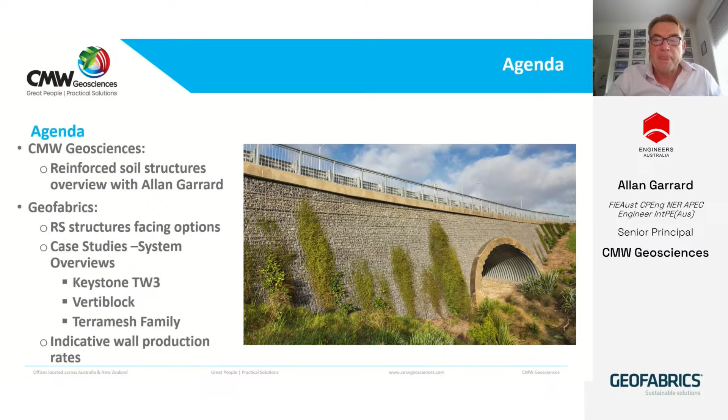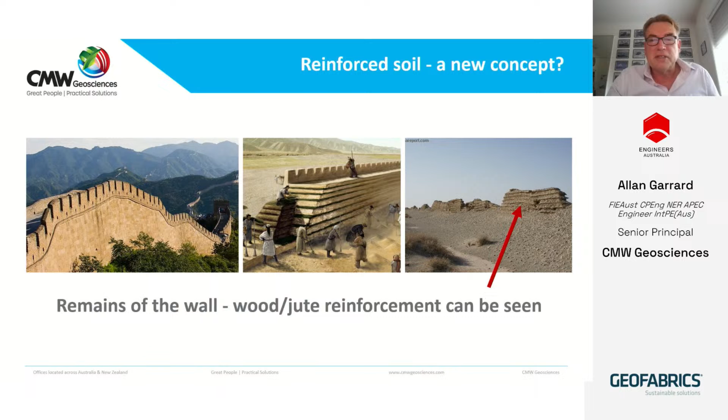So reinforced soil isn't a new concept at all. It's been used over hundreds and even thousands of years. The Chinese were into reinforced soil structures, and there's plenty of evidence of that around the world.

I was first involved in reinforced soil structures in the mid-80s when it was quite new in the UK, and we designed different types of reinforcement in soil structures and instrumented them to convince the road authorities at that time that these actually worked. So modern reinforced soil structures really came about through the advent of plastics, high strength plastics.

So it was a breakthrough in innovation at the time, early to mid 80s, and has been used extensively throughout the world since.

The greatest attraction is the versatility of these types of structures, and they can perform under extreme loads and have the ability to reach great heights. Asia is a good example of reinforced soil structures where designs have gone up to 60, 100 meters or more. And there's some examples there in the photographs.

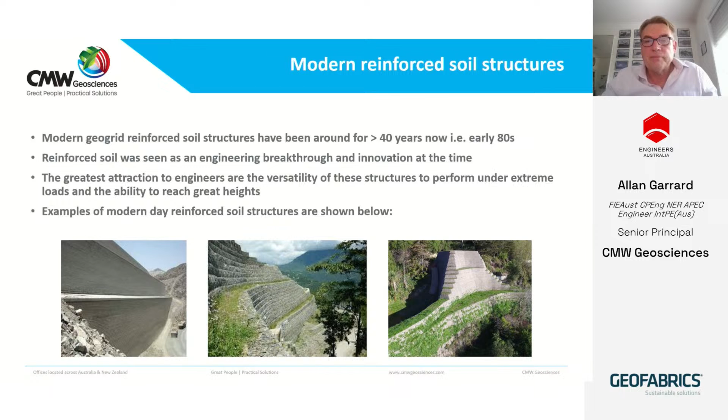So also through time, reinforced soil structures have become much more cost effective compared with other types of retaining walls. And this is a graph from Koerner et al., which indicates that after around 4 meters retained height, reinforced soil structures become hugely cost effective, and especially that cost effectiveness increases with height.

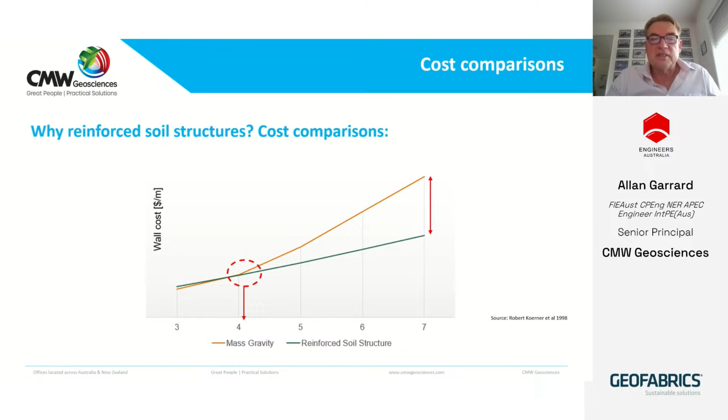So these are the components of a reinforced soil wall. You've got some sort of facing element, and there are a huge number of examples of facing elements, and I've used many throughout my career. You've got the reinforcing element, which can be grid or high-strength geofabric.

And then usually there's some sort of internal drainage system within the wall, and often behind the wall at the heel of the wall, to make sure that the wall doesn't experience loads from water seepage and flow.

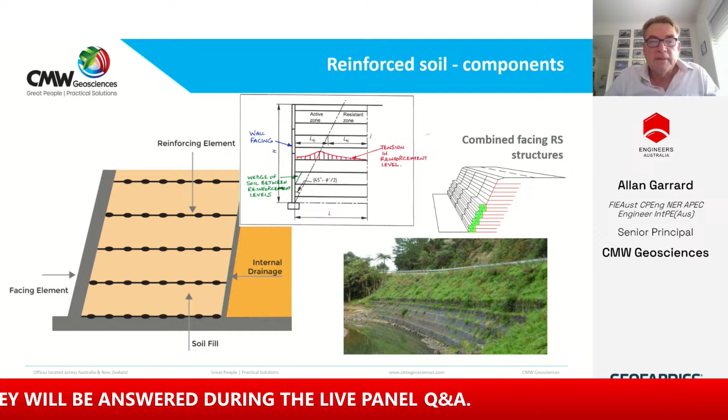In the middle of the slide there, I've got a little cartoon which shows how a reinforced soil wall works. So if you look at that active wedge coming up from the toe of the wall, if the reinforcement and the facing weren't there, that active zone would be lying on the ground in front of the wall. What the reinforcement and facing does is allow that structure to be built vertically, and you can see in red a depiction of the tension in the reinforcement element, which is fairly small at the facing and really only serves to retain a small wedge of soil between the reinforcing elements at the face, shown there in green.

And then the tension climbs to around a maximum of around where the active wedge crosses through the reinforcement, and then the tension tails off towards the back of the reinforcement.

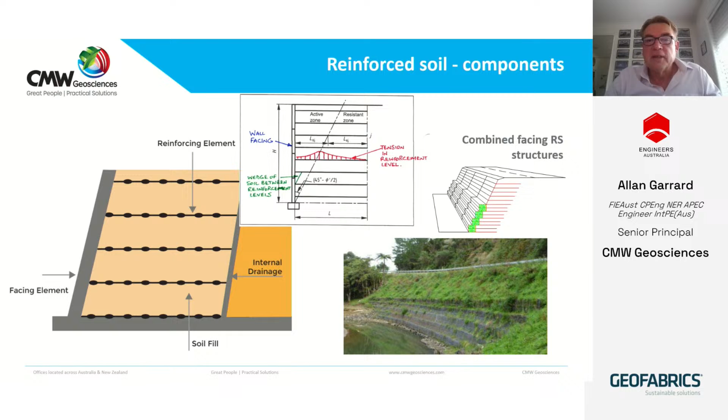There are many structures which utilize a combined facing. The example in the photograph there and in the sketch above shows a sort of gabion type facing for the bottom half of the wall, and that's to do with issues of erosion from flooding of the creek. And then the remainder of the wall can be a separate facing system. So that's quite common in practice.

This is a real world example of how the reinforcement works. You can see the block facing at the front. The reinforcing elements are shown in red dotted lines, and the active wedge is shown in yellow. The reinforcement allows that wall to stand vertically.

One of the reasons reinforced soil structures are so cost effective is that the vast majority of reinforced soil structures are built from soil, and the reinforcement and facing is only a small part. So the actual materials required are very low in volume, and the reinforcement acts with the soil as a composite system.

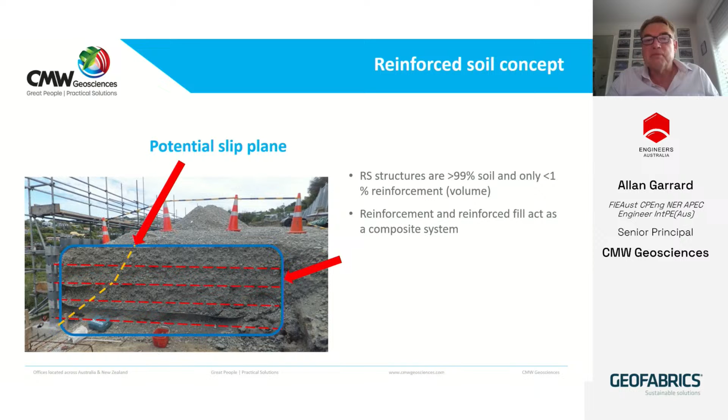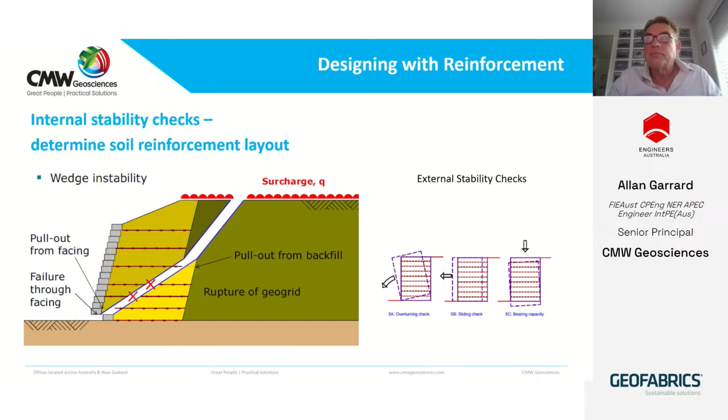These are failure mechanisms directly from the Australian Standard, AS4678, earth retaining structures, as shown in the standard. It's critically important if you're embarking on designing reinforced soils, or any civil engineering structure, to understand what the mechanisms of failure could be. That's where I start when designing anything - how could it fail?

So these are examples given: sliding at the base, sliding on one of the reinforcement levels, rotation about the toe of the wall, rupture of a connection - either an anchored connection or a connection where geogrid is wedged between two elements of the facing system - rupture of the reinforcement at the connection, and some sort of failure or rupture of the facing itself.

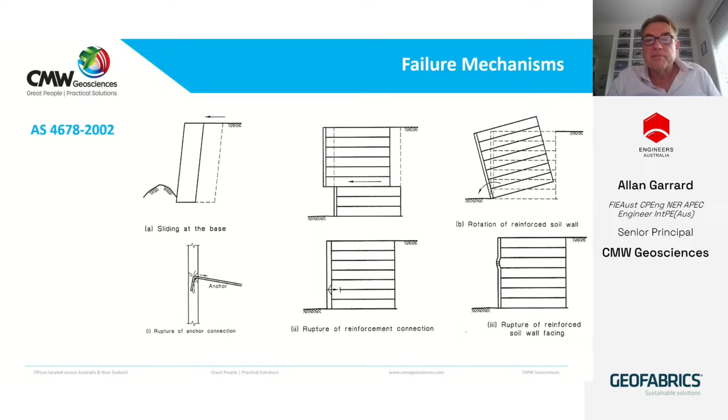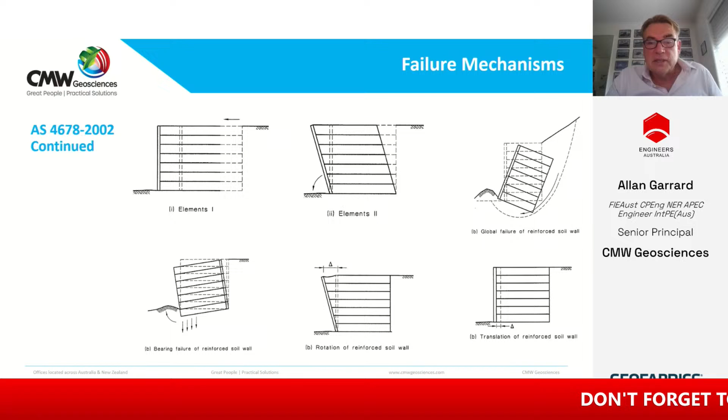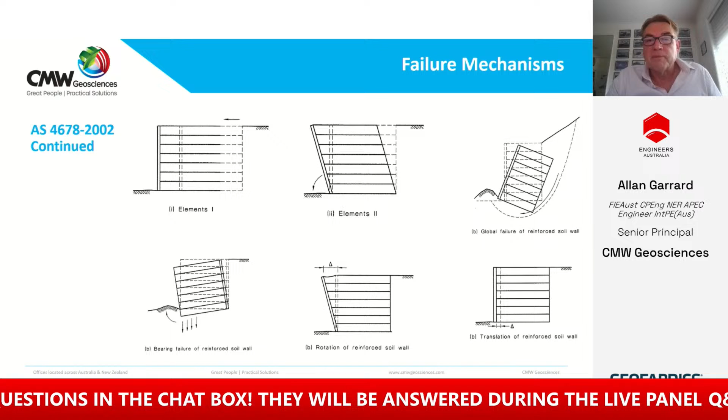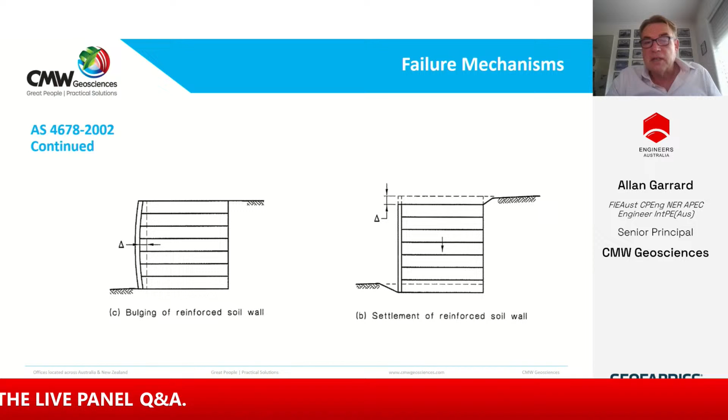Bottom left is bearing capacity failure. Bottom middle is rotation of the face, which could occur if the reinforcement is too extensible. Bottom right is some sort of translation of the facing. These are the last two in the Australian Standard: bulging of the facing and settlement of the reinforced soil block itself.

Now we'll talk about some examples from practice that I've been involved with and others that I know have been involved with, comparing these actual examples of failure mechanisms to those depicted in the Australian Standard.

On the left, this wall has suffered sliding at the base, and there's a little bow wave in front of that wall, which is difficult to see but it is there. There's also a separate, and possibly combined, mechanism of sliding and global stability.

On the right, you can see tension cracking at the back of the wall. The wall's underneath that speed bump. So the wall is possibly rotating as well as sliding forward, and also some bulging happening on the face. That's multiple mechanisms for one wall.

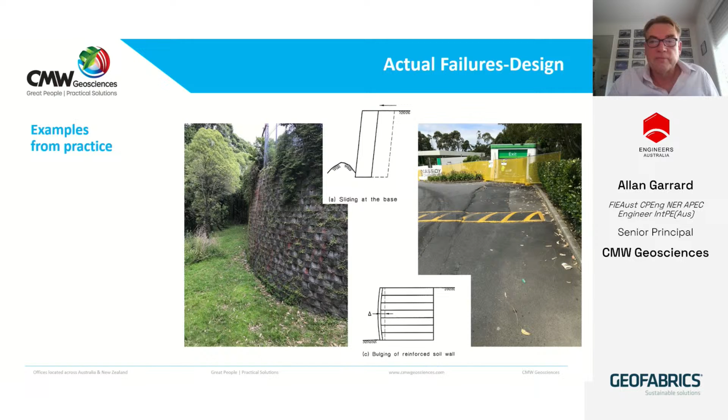This is an example of where the wall has failed in sliding on one of the reinforcing elements, so that needs to be checked as part of the internal stability analysis.

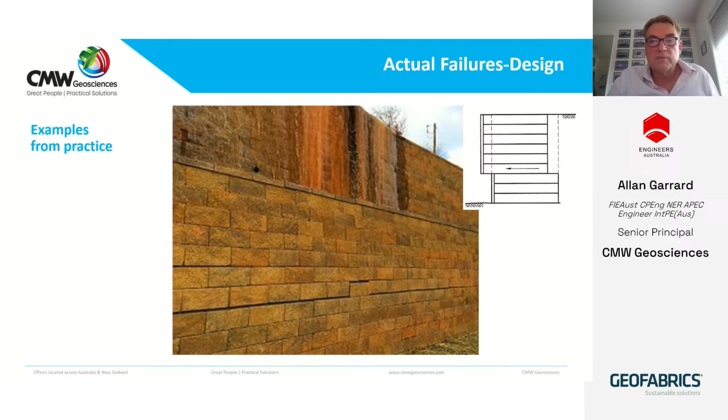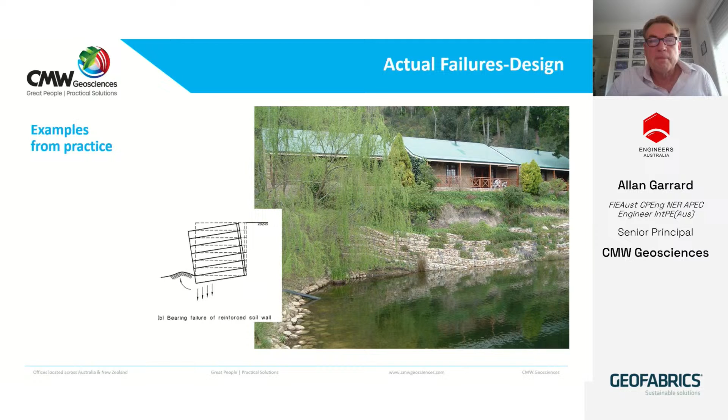This wall is a bridge abutment. The wall is off and down to the right, but it's failed in global stability, where the wall has rotated, and that bush is growing out of the major tension crack that has occurred in the road.

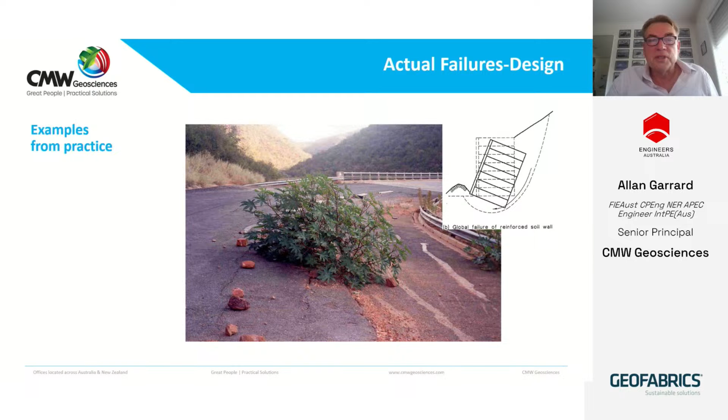This is another example of global stability, but in the previous case, the failure envelope exited well in front of the toe of the wall. In this case, the failure plane or failure envelope exited near the toe of the wall.

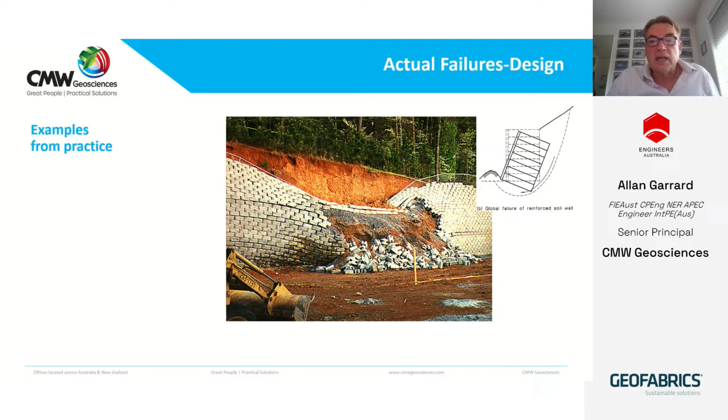Here are examples where the reinforcement connection has ruptured, allowing the facing to spill forward. Although it's not a catastrophic failure, it's certainly something that needs to be fixed.

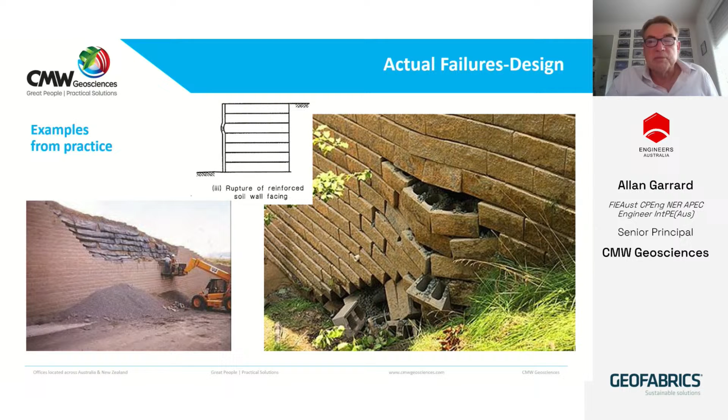This one here is more on the construction side of things. The previous failures were more about design issues. This one is where the reinforcement wasn't long enough. In fact, it was curtailed by the contractor because of a whole load of services that had to be placed in the back of the wall. So the contractor hadn't been talking to the designer about whether it was possible to curtail reinforcement at the back.

The sketch on the right-hand side is one I was involved in many years ago, where the design length of reinforcement wasn't achieved because the contractor didn't understand what the reinforcement was doing, why it was necessary, and skimped on the excavation. So although the reinforcement was the right length, it wasn't placed in the right spot. It was just led up the slope, and we dug forensic slots into this wall to find that this was the case.

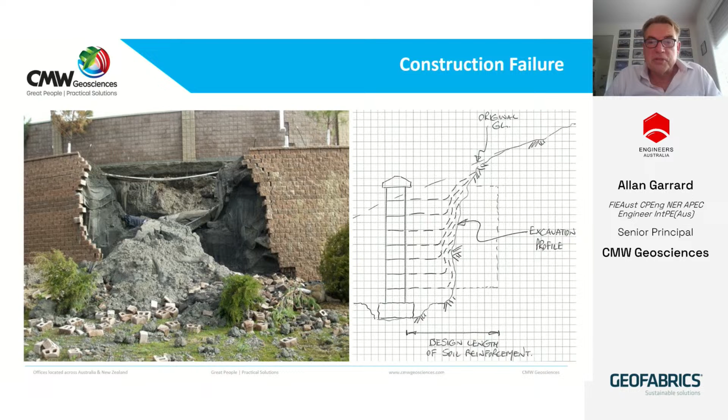So the other main category of failures is drainage issues. We've had design issues, construction issues, and drainage issues. Drainage issues, you could say, is probably mainly a design issue, but could also be a construction issue, and could be a temporary works issue, because the wall on the right failed during construction with insufficient drainage to avoid the development of sinkholes after heavy rain.

The one on the left is mainly about erosion, where the reinforcement's been exposed by excessive erosion.

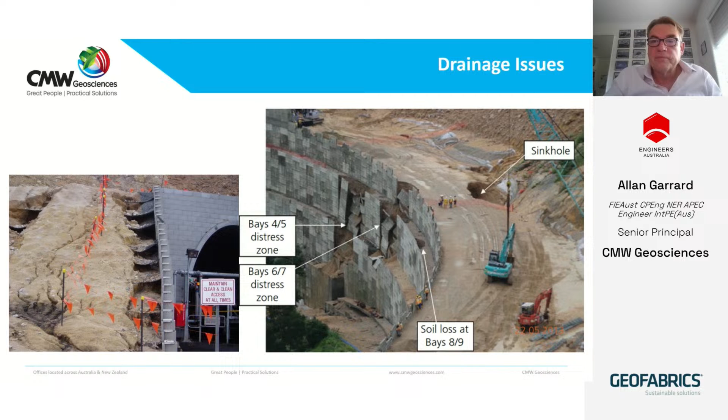This is an example from my own experience fairly recently. This is a 27-metre high reinforced soil wall built in Queensland, Australia. We used the TerraMesh system with a gabion front and TerraMesh tails and a main Paralink reinforcement system. This wall caters for heavily loaded large mine trucks, as well as being as high as it is, and hasn't suffered any movement at all from the monitoring that we've done.

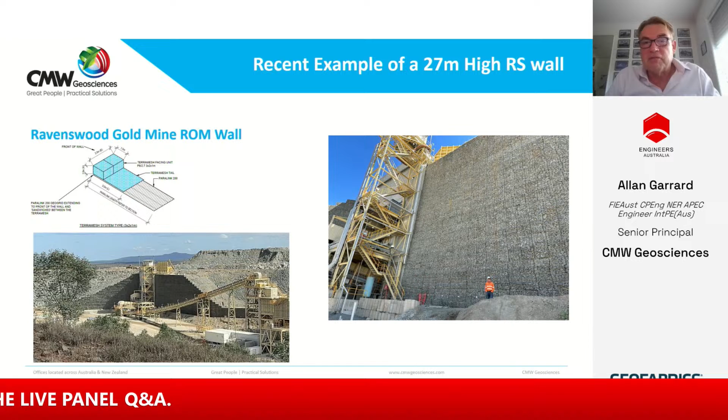So this shows that these types of walls can be built very high and to cope with very large loadings. The beauty of them is that they have a flexibility to cater for large loadings and extremely high heights. Thank you.

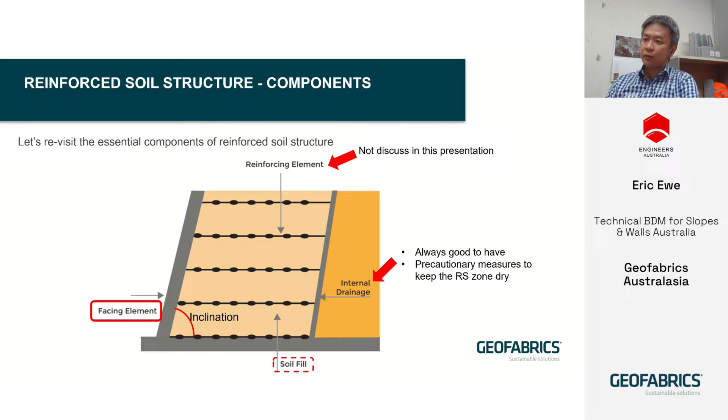At the same time, we're going to also talk a little bit on the different types of soil available for the type of reinforced soil structures, depending on the face inclination. We don't have time to discuss in detail the options of reinforcement used in this presentation. And it's always good to know that as a reinforced soil system, you probably want to allow for some internal drainage. It is something more of a precautionary measure to keep the reinforced soil structures dry.

Before we talk about reinforced soil facing systems, these are the common factors when it comes to consideration on the type of facing system. They are obviously aesthetics - this dictates the final look of the structures to blend with the surroundings. The face angle affects the type and suitability of the fill material specification. We'll cover that a little bit after this.

The speed of installation also can be dictated by the type of facing. Certain types of facing obviously will be able to construct quicker than others - situations such as emergency works requiring speed, cost of labor, etc. Location also matters, depending on where you are, some facings may be readily available, so that dictates the consideration for facings as well. Lastly, environmental - some clients prefer a vegetative look, or some prefer a rock look, to blend with the environment.

Obviously, all of that affects the entire cost of the retaining structures.

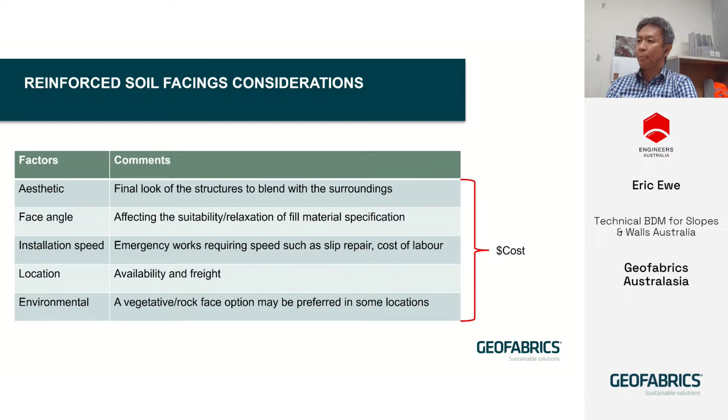Before we talk about facing systems or options, it's good to know the demarcation or determination of whether you're considering mechanically stabilized earth walls, or reinforced soil slopes for structures gentler than 70 degrees. As you can see, 70 degrees is internationally recognized as the boundary: beyond 70 degrees are walls, below 70 degrees are slopes.

Some considerations: there is more published design guidance for walls compared to slopes. Lateral earth theory governs external stability typically for walls, whereas for reinforced soil slopes, slope stability theory governs, and there is less published guidance for slope design.

In terms of the connectivity or connection strength between the reinforcement and the face of the structure, this is much more important and critical for walls compared to slopes. Not that it isn't important for slopes, but it's less demanding, and the geogrid strength demand is much greater for walls compared to slopes.

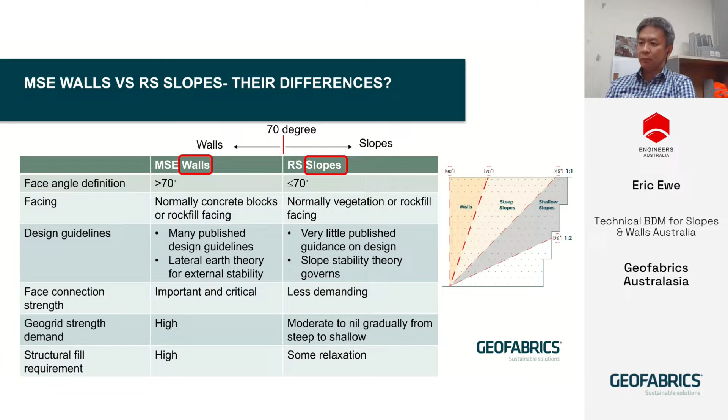The demand gradually diminishes from a steeper angle of say 70 degrees to a gentler angle of less than 1 in 2. Structural fill quality is very important for walls, with some relaxation allowed for slopes. Let's look at what the design code says about soil fill requirements.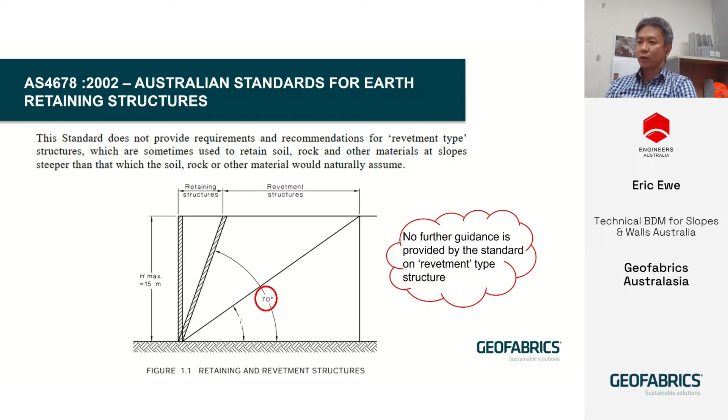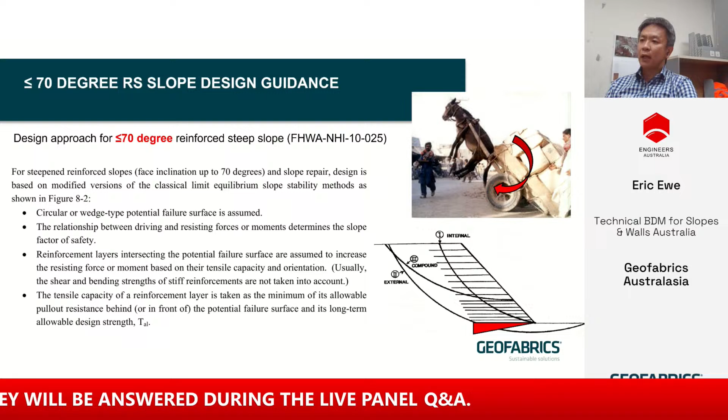So we have to refer to other guidance for reinforced soil slope structures, which is the American Federal Highway guidance. For steepened slopes up to 70 degrees, the design should follow conventional slope stability analysis methods. They identify three types of modes: external, overall stability; compound stability, somewhere in between; and internal stability, making sure the structure is self-stable with layers of soil reinforcement.

The reason for using slope stability method compared to lateral earth pressure theory is illustrated by that diagram, whereby the donkey is lifted up due to the weight of the goods behind it. This is represented by the pressure exerting at the rear of the block compared to the toe of the block, thereby increasing the criticality of slope stability.

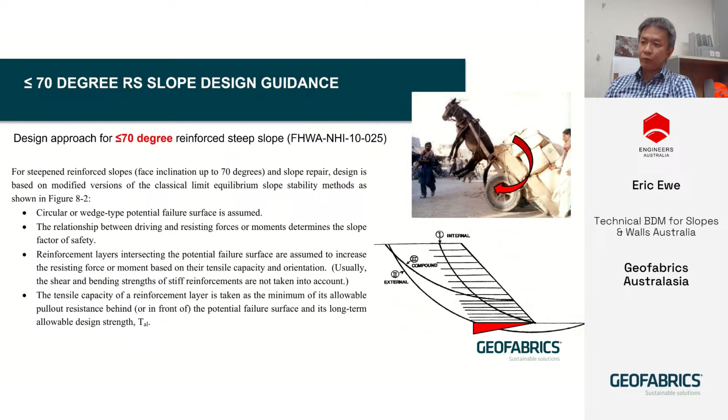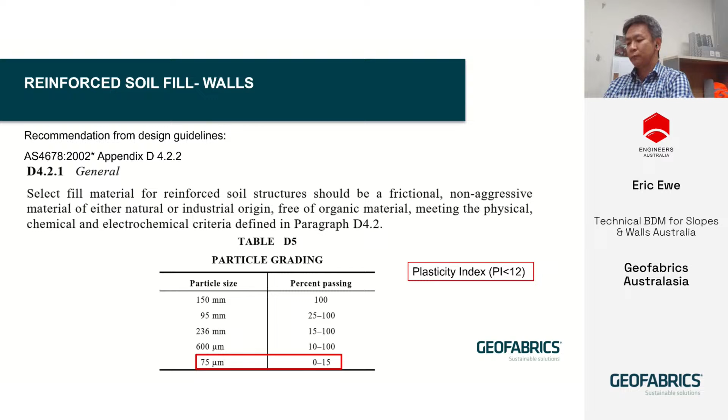I mentioned earlier that for slope structures there is little guidance, so we have to go back to the Federal Highway guidance, whereby for wall structures the criteria are similar: 15% fines content, plastic index less than 6, a little bit more stringent—in other words, granular fill material.

But for slope structures, much more relaxation is given in the guidance. The fines content now becomes 50% as opposed to 15%, and the plastic index can be up to 20.

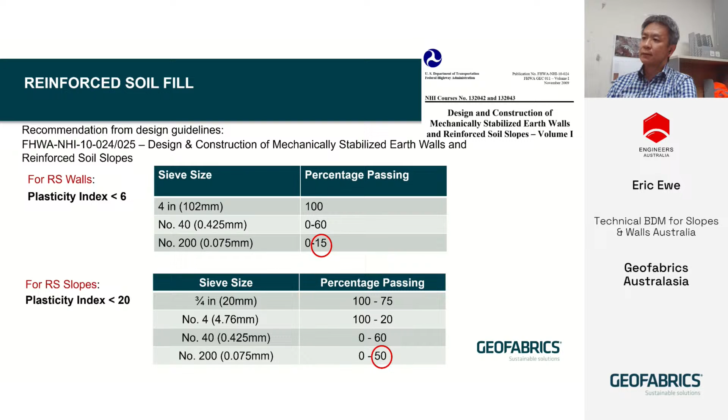When we talk about soil use, most design guidance and codes of practice take a precautionary approach, mainly because the type of soil in any retaining structure or reinforced soil fill controls the serviceability limit state. The design discussed earlier was mainly for ultimate limit state, making sure the structure does not fail catastrophically.

So let's look at how soil affects the serviceability limit state of reinforced soil. The first serviceability limit state is wall deformation. There are a few factors that may cause deformation, and the key factors all have to do with the type of fill.

The presence of a wet layer of soil during construction causes creep settlement of fine-grained soil—again, the plastic index and percentage of fines control that. Swelling of fine-grained soil, simply because with moisture fluctuation, fine-grained soil is easier to swell and shrink, causing deformation.

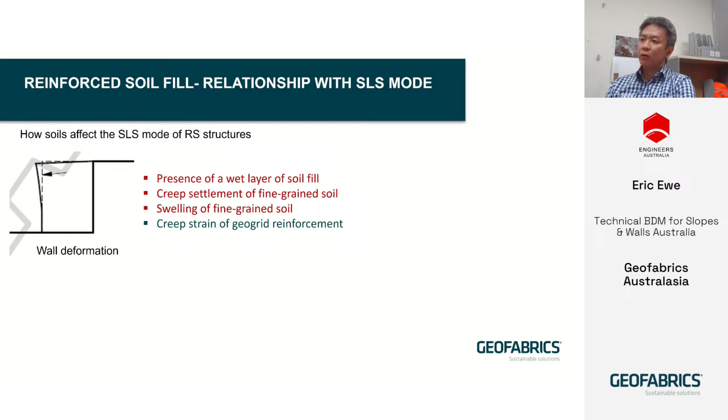There is one more factor that may cause wall deformation, which is the creep strain of geogrid reinforcement. But this is an item that, if you design correctly and adopt the correct long-term tensile strength by applying reduction factors on the geogrid, is quite easily overcome, as long as you do your homework.

The next type of serviceability limit state comes down to settlement. The deformation may be caused by foundation soil settlement, external loading not considered, and the last two items have to do with the type of fill you're going to use, i.e. the internal fill soil settlement and creep settlement of fine-grained soil. So in short, the type of soil you're going to use basically affects more so the serviceability limit state.

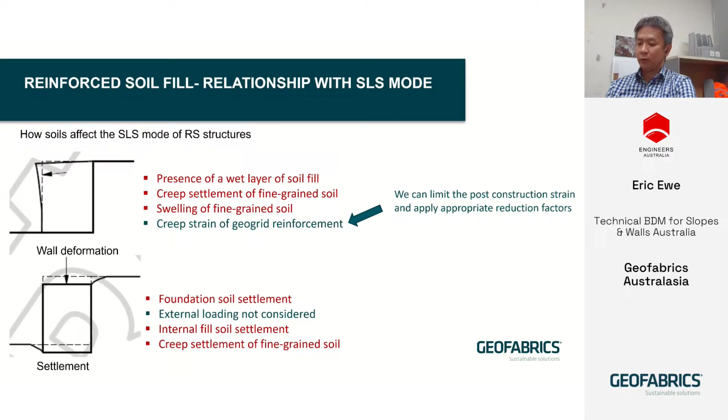So precautionary measures are best adopted. Here's a summary: some relaxation of the fill soil type can be considered for slopes rather than walls. Particular attention to soil PI and fines percentage - these are the two properties that control the swelling and shrinkage of the soil, subject to moisture. The whole idea of a specification is to ensure a sound and durable, predictable structure's performance in the long term and over a wide range of construction and service conditions, i.e. the serviceability limit state.

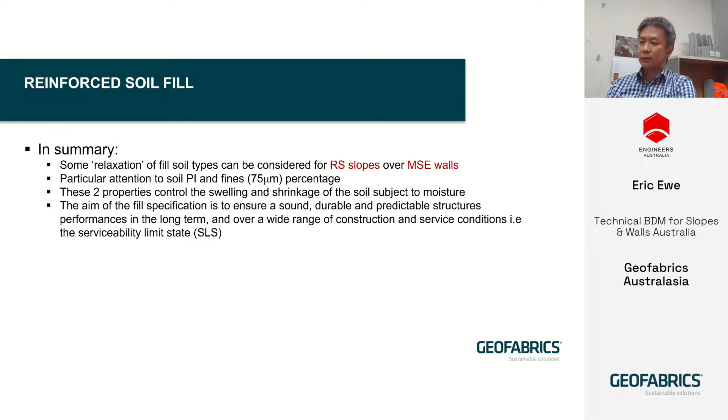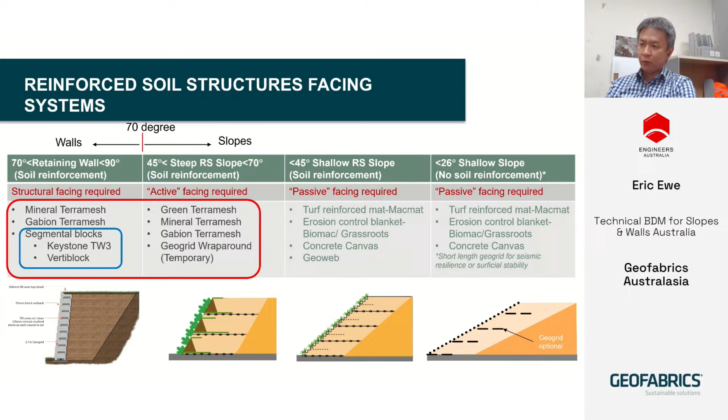Let's have a look at Keystone TW3 segmental block wall. These are small size dry cast concrete blocks incorporated with geogrid reinforcement, and there are different types of concrete blocks available in the market. The TW3 blocks we are talking about in this presentation have what we consider a mechanical connection between geogrid reinforcement and the block system. This is by means of a blue color mechanical connector incorporated during installation, engaging itself with the geogrid type we're using to create a positive connection.

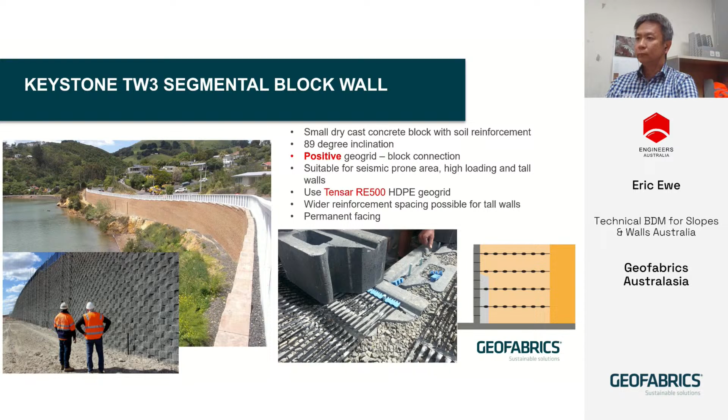So this is how it looks like. We have the block, 455 by 200 high and 300 millimeters wide. It's a small surface area. To improve the connection between the geogrid reinforcement and the face, we incorporate something called a polymer connector, identified by the blue color connector on top, in addition to the alignment pin.

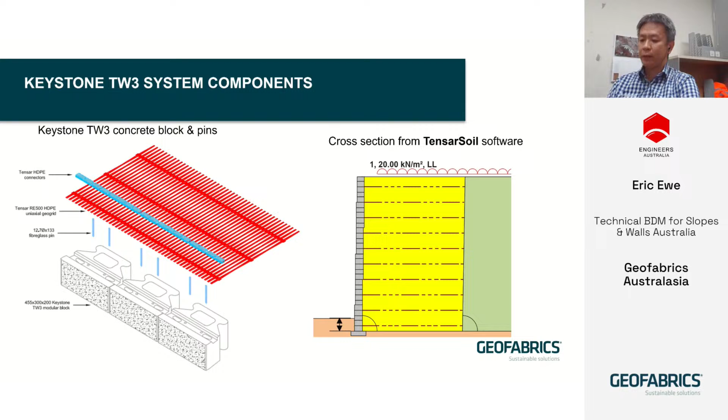So why do we bother to incorporate a mechanical connector? This is one example of a typical facing connection failure. If you notice closely, these blocks have no hollow core voids, so they are solid concrete, smaller scale size in terms of width. Usually fine, no issue, but for some unexpected forces, such as earthquake, close loading to the face of the wall, or moisture fluctuation, you may get some loss in terms of friction - which is what this type of facing relies on, frictional connection - and therefore peeling off or surface failure.

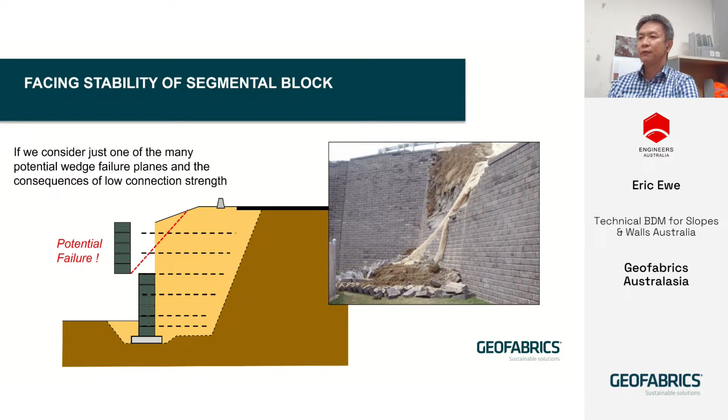When we talk about connection strength, this is how we test the connection strength between geogrid reinforcement and multiple different types of blocks. You get a value, you get data, and this is part of the NCMA method for testing connection strength.

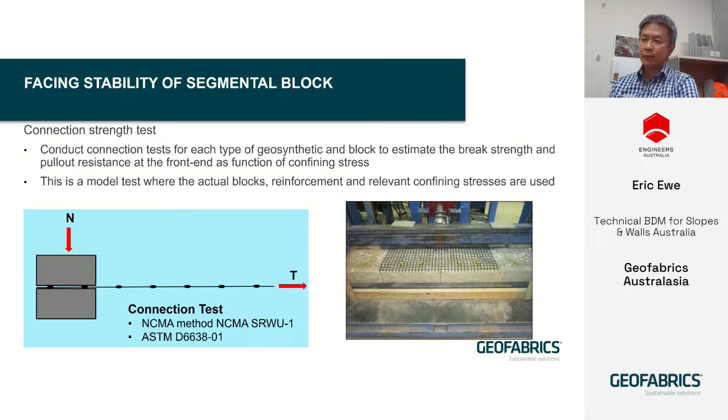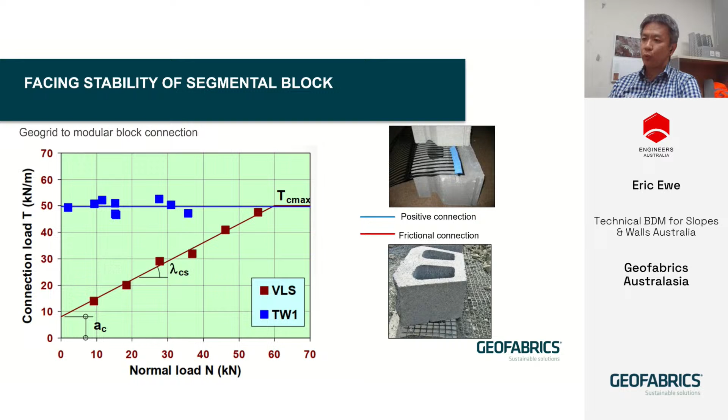A typical mechanical or positive connection strength load looks like the blue line, which is independent of the normal load acting on the geogrid. Whereas a frictional connection will have strength, obviously, but only when you have quite a high load acting on top of the geogrid, due to the friction between the top and bottom of the geogrid.

What this means in the actual field is that you're able to utilize much more of the tensile capacity of the geogrid reinforcement near the face at low overburden pressure for a mechanical connector, for a positive connection, compared to a frictional connection which relies on higher overburden pressure acting on the geogrid, as shown by the envelope here.

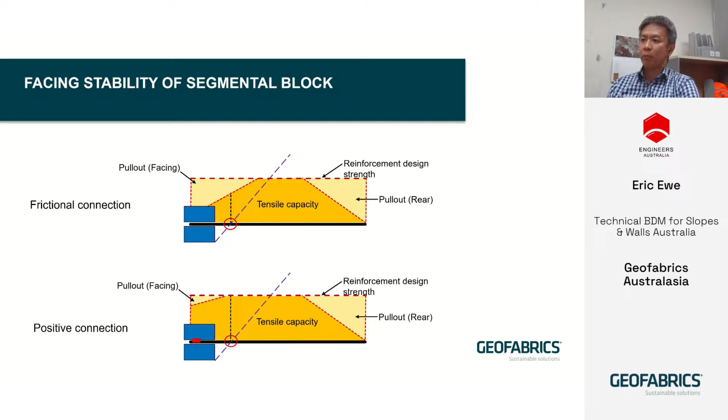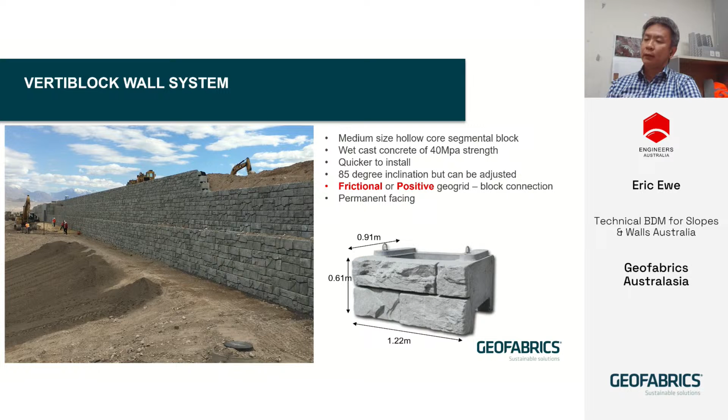The next type of concrete segmental block is called a verti-block. It's a medium-sized block, 1.22 meters by 0.6 meters high and 0.9 meters in depth into the soil side. It's wet cast concrete with a shear lug at the top where the next block sits, providing very high shear capacity. It's hollow core, much quicker to install, with 85-degree inclination.

This is how it looks from a plan view. You basically fill up the voids with drainage aggregate and lay geogrid reinforcement over the block to create the connection between the blocks and the geogrid reinforced soil mass.

For this type of block, due to its size, width of 0.9, and weight, there's still a connection strength requirement since this is a wall, but due to the size, it's less critical compared to a smaller block when it comes to needing a so-called positive connection.

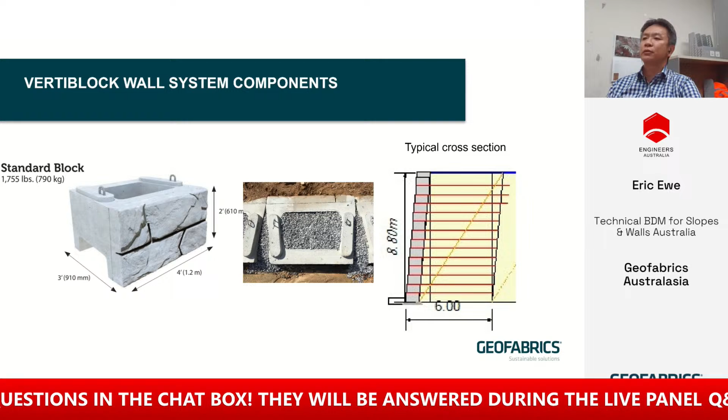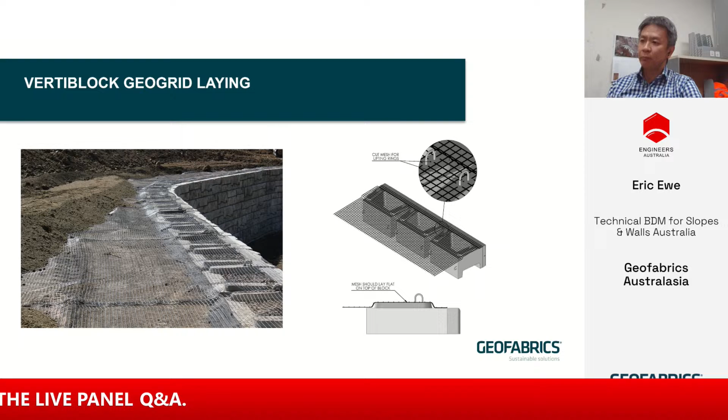This is how the geogrid is laid over the entire surface area of the block. After the block is laid and filled with aggregate in the core, the next layer of block sits in between the shear lug, creating the connection between the geogrid and the upper block.

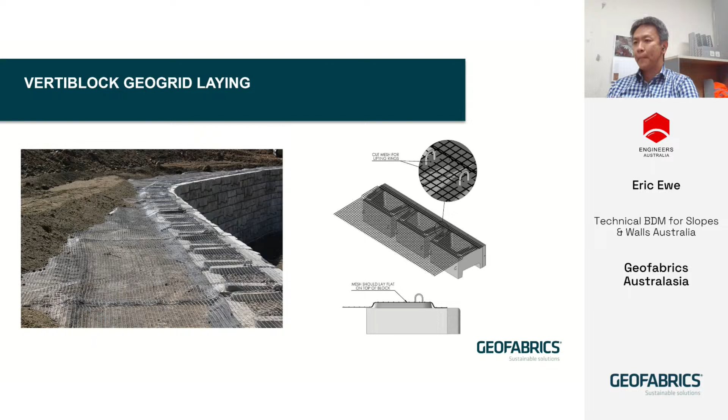This is a reinforced soil presentation, but I wanted to show this slide because this is a big block, so on its own it has its own weight. The standard block weighs around 800 kgs, and you can use an extended block if necessary to construct the wall up to a certain height without geogrid, acting as mass gravity.

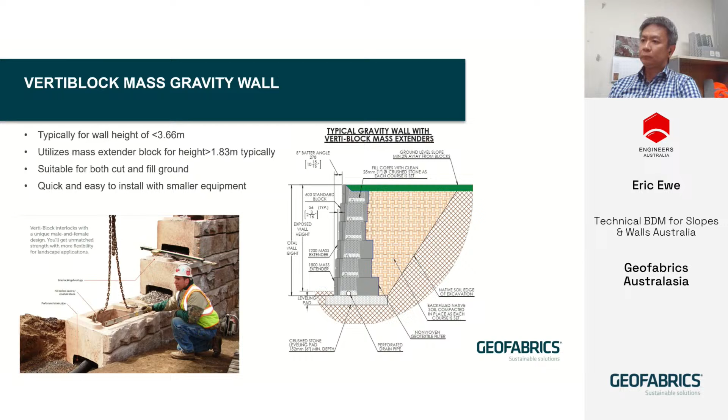That's it, I'll pass it on now to my colleague Jim to continue on the double twist mesh facing system or other types of reinforced soil structures. Thank you, Eric, for a great presentation.

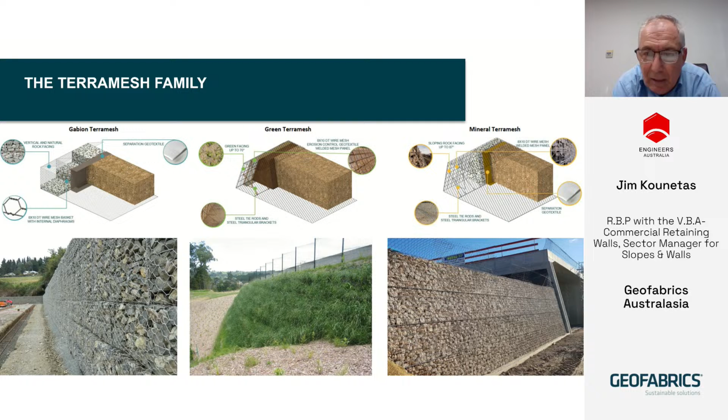The first one is the traditional Gabion TerraMesh, which has been around for a while. It has an integral tail in a 1x1 unit, and most Gabion or TerraMesh units are 2x1x1 with a 2-meter tail, meaning 3 meters from the face to the back. It's integrated and typically goes between 70 to 90 degree inclination, suitable especially for hydraulic forces. It's a permanent facing, 1 meter wide, quite robust and relatively easy to install.

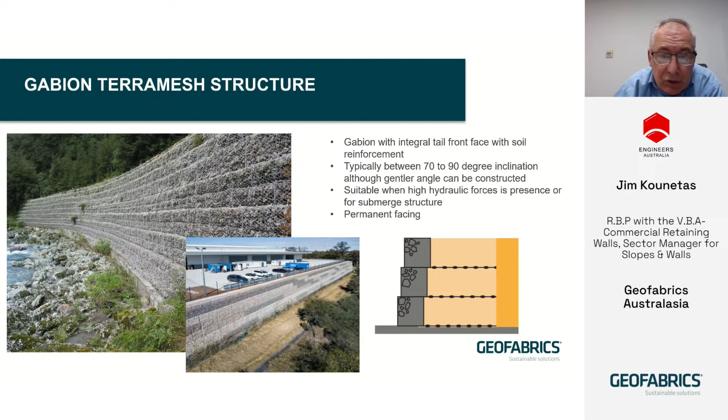Sometimes for higher walls, we introduce geogrids on top of the existing TerraMesh unit. That TerraMesh unit, called the L length, is the same material as the Gabion, so it's integrated with a predetermined 2 meter tail, or 3 meters overall. However, on higher walls, as shown in that cross section, we can introduce geogrids—in particular, that one there is called the Paragrid.

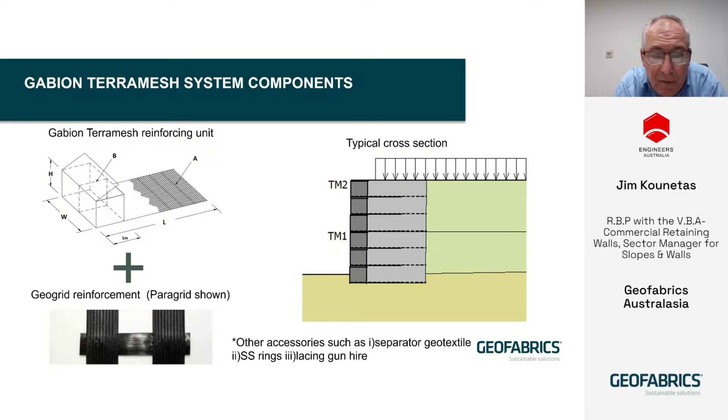The other two TerraMesh units are the mineral TerraMesh and green TerraMesh. They're basically the same unit, however one is mineral being rock, as you can clearly see on the left-hand side there, showing a bit of rock facing. On the right-hand side is green TerraMesh, where we put a bit of topsoil with some seeds, which encourages the grass to grow through the actual face, through the biomat. Predominantly the most common angle of these units is 70 degrees.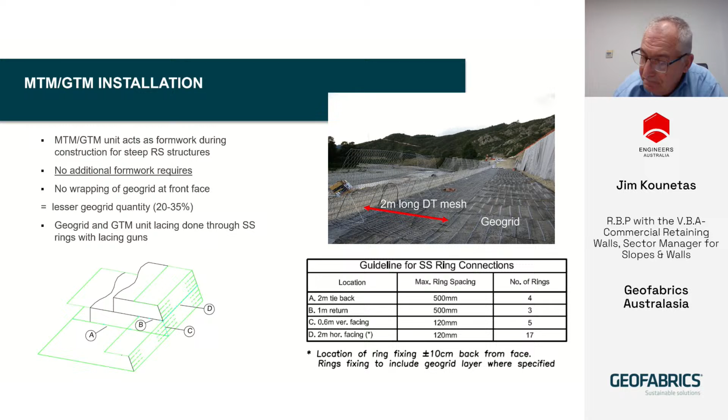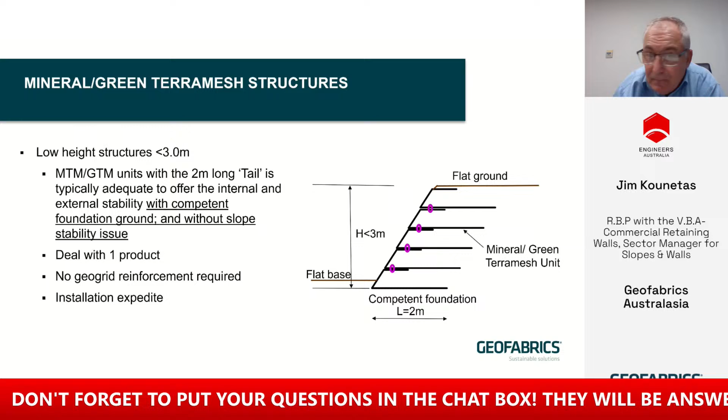With structures less than 3 meters in height, the actual TerraMesh unit, being either green or mineral, would suffice. You won't need any other additional materials, just one unit will suffice. In other words, you're only dealing with one product. You won't need any additional geogrids, and it's very quick to install. It comes flat packed - you install it, put it in position, and just leapfrog it as you're backfilling. The next slide will demonstrate that.

This is a particular example we did up in New South Wales, and you can clearly see the terraced green TerraMesh, and you can see the biomac - it's a jute at the face, and that will obviously encourage a bit of topsoil. That also has a geogrid, but in this case it's a tensile geogrid going to the back of it for that determinant of that height.

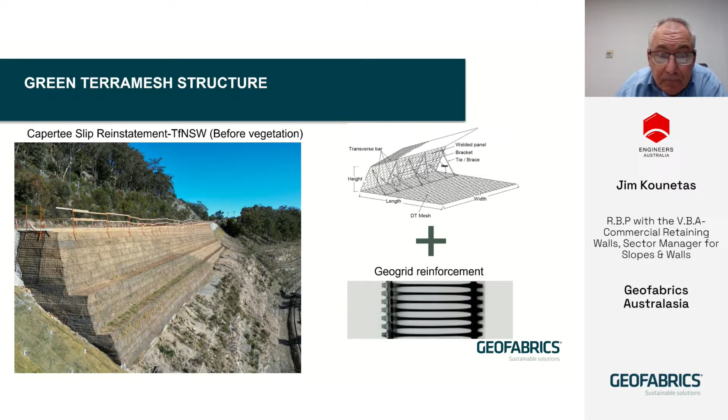There you go, what I was referring to. Now you can see in this particular slide the mineral TerraMesh where we've introduced a bit of rock facing. There's the bracket that determines the 70 degree traditional angle. You can see how it's effective. A lot of people just think it's a full 1 meter wide Gabion, but it's not - it's actually just 300 mil. As you can see from the left-hand side, you can see the actual TerraMesh unit, the bracket, the rock, and then there's a little bit of geotextile, typically Bidim, just behind it to separate between the soil and the rock, so it doesn't migrate through.

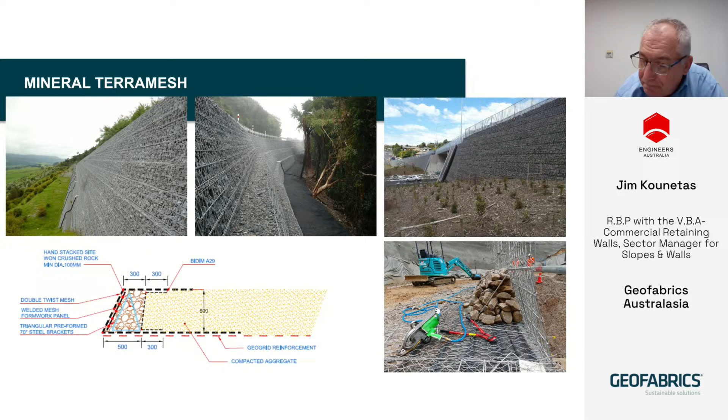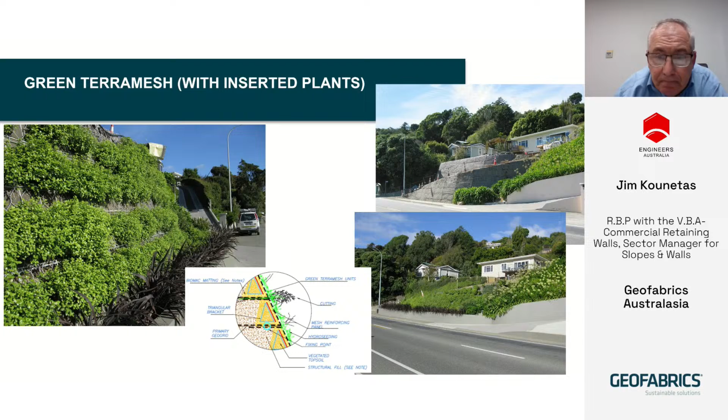A few more photos of various vegetation. Now, vegetation also depends on the orientation of the TerraMesh unit, if it's facing particularly the sun and all that - also the topography, I suppose, is another factor. But traditionally, the soil that you put in, that little bit of topsoil, if you introduce some sort of seeds, it'll just grow through.